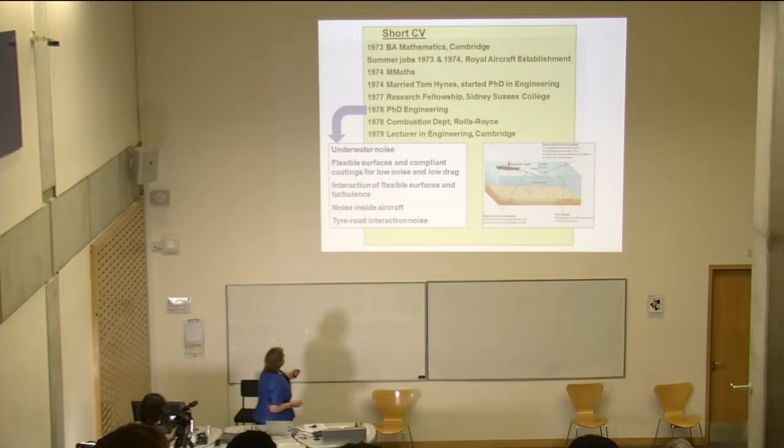So they asked if I would apply the kind of techniques I developed to jet noise to this underwater environment. That led me into the whole issue of turbulence near flexible surfaces and compliant surfaces. One of the things I worked on quite early on was putting flexible coatings over sonar systems in order to attenuate some of the noise of the turbulence.

I did some theoretical work which showed it could be beneficial. And, you know, with a ministry project like that, you never really know—they just say, oh yes, that's very interesting.

I think 15 years later, I served on a senior promotion board within what was probably by then not quite DERA yet. The person I was asked to review had taken that work and manufactured the compliant coatings, and they'd used them. So no one told me that at the time.

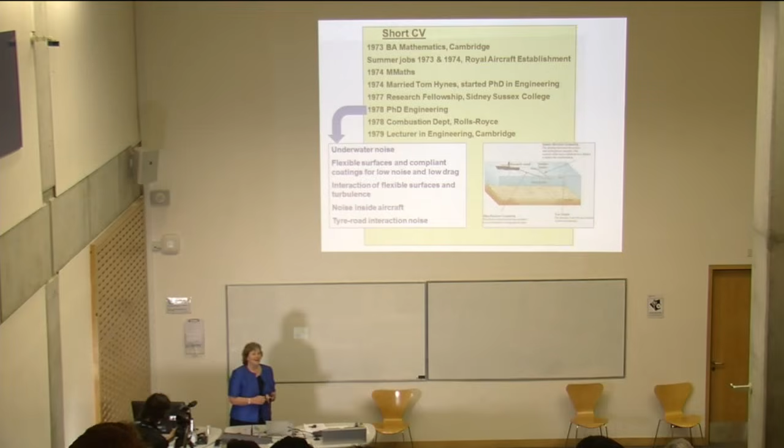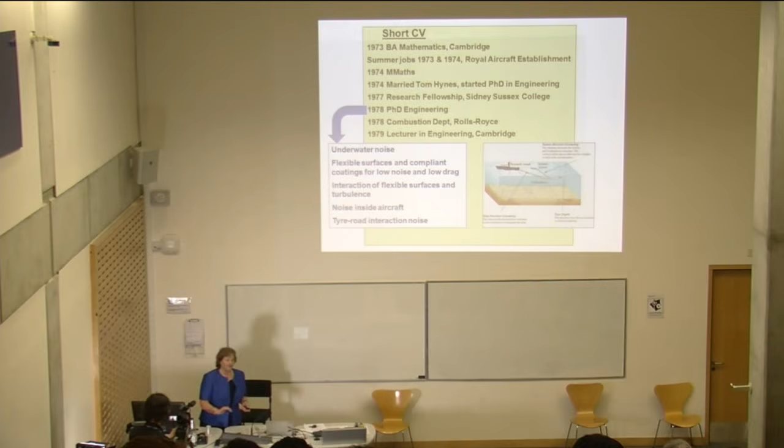But that led me into a whole load of other things relevant to water, like how can you use flexible surfaces to reduce the drag on hulls. We know dolphins have very flexible skins, and it was learning from nature the kind of compliance that could do things like attenuate the onset of turbulence, or if the flow was turbulent, reduce the drag.

So this got me into all sorts of problems in underwater acoustics, and one of them I'm shown here.

This was some work I did at the request of Schlumberger, part of the oil industry. Schlumberger help oil producers find oil-bearing rocks, and it's done by towing what they call acoustic streamers, which are long aerials, and these can be up to 2 kilometers in length behind a ship.

In this long streamer, they would be full of hydrophones listening to the noise, and then they have a source, and they listen to the reflected waves coming back from the rock. From that, you can determine the speed of sound in the rock and identify where you've got the kind of changes in structure that would mean oil would be trapped at that location.

But as they tow these hydrophones, there's a turbulent flow over them, and they're listening for these weak reflected sounds with turbulence on top. The question is, how can one attenuate that? It turned out again that you can make fancy layers of the right kind of compliant material in there to attenuate that so-called flow noise.

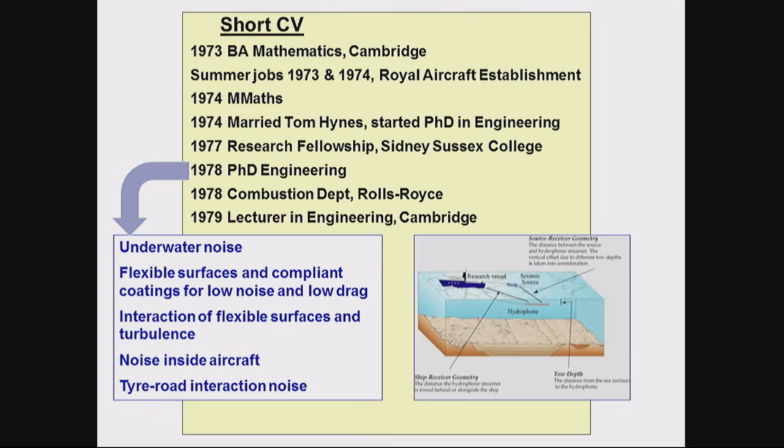One of the things Schlumberger wanted to do was go from that sort of diameter aerial, which would be filled with liquid, to much smaller diameter, so it'd be easier to deploy, with a viscoelastic interior. I developed techniques which they used to design those so-called dry streamers rather than the liquid-filled ones.

It turned out to give them quite a niche in the marketplace, and meant in the end that with those small diameters, instead of towing a single one as shown here, you can actually have ships towing about 10 or more streamers at once and getting much more information.

Up front, the lower noise is because you put sensible things on the walls that stop that transmission. So actually, it's very similar to the sonar problems - turbulence on the outside, what's the right coating and what noise would you get inside?

A particular element of the fuselage is, for structural reasons, it's got lots of ribs. So as the turbulence excites the walls, there's lots of scattering that happens on the structural reinforcements, which made that a particularly interesting project. And then led me into my next noise project, which was, well, if you can do the stringers and ribs that support the aircraft structure, you ought to be able to do the patterns, the tread blocks on a tyre.

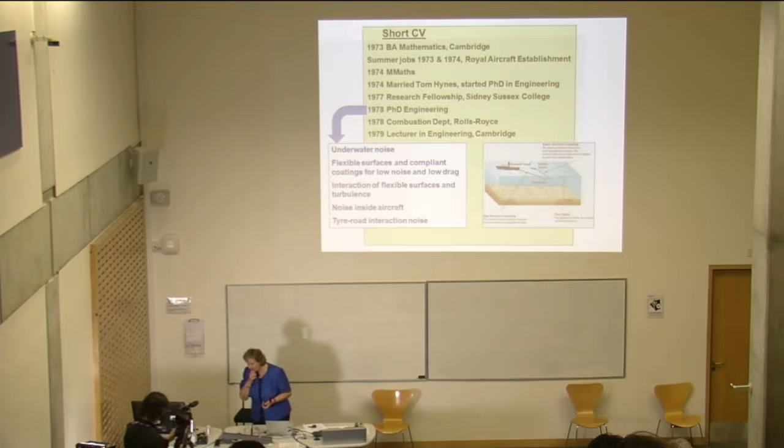Currently, the design of the tread pattern on the tyre is done by the design department. And I don't mean mechanical design - this is the aesthetics of something that looks like it's a tyre that would go fast and looks modern. So it's purely then being done on what it looked like, and so there'd be nice sweepy things.

Now they had techniques that could predict how effective different patterns were at shifting water, but they couldn't predict the noise level effectively from different patterns. So that was the question: can you help us do that? Lovely question to be asked.

And that led into a whole series of work. One of the things that's really important there is those tread blocks vibrate in a contact patch where the tyre's shaped like that and the road's underneath, and just the shape of that geometry gives a huge amplification.

It's the equivalent of having something vibrating in free space or putting it in a trumpet where you've got a horn to match the impedances. So easily one got 20 dB amplification through that horn effect. And we dealt not only with the vibration, but how one could get a more leaky horn and avoid some of that amplification.

Another area that was an important influence on my life - I'd been in Cambridge throughout. I wanted to get some industrial experience, and I went and worked in Rolls-Royce. Again, it wasn't for very long, just for 3 months.

I went and worked in the combustion department, so doing something completely different, and they gave me a job to do. I designed how one could optimize a sampling to get the most representative sample from the exhaust of a jet engine. But as I was leaving...

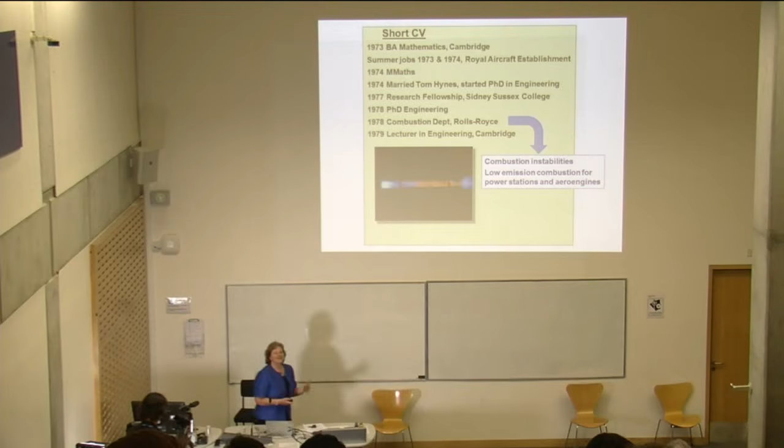And that set up a rig that became a really important part of a very flexible rig that allowed me to do lots of things around combustion. This is a picture—not a very good picture, but this is one of the geometries we looked at.

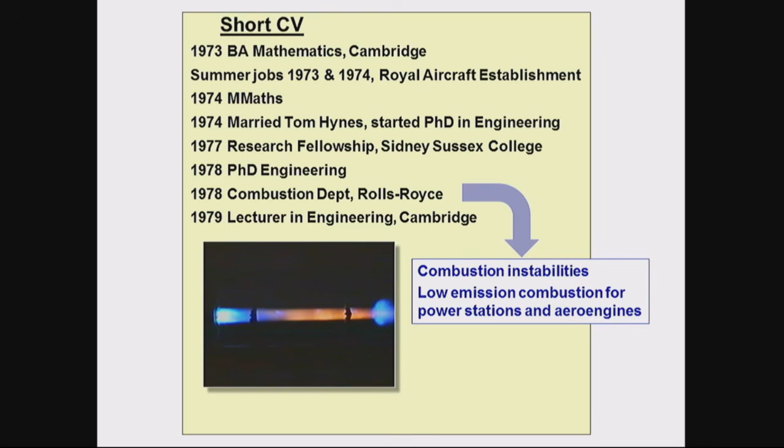What's at the heart of these instabilities is that you have combustion in a combustion chamber, which just tends to be a resonator. When you perturb the combustion, the unsteady combustion generates sound—if at home the gas boiler comes on, when it first goes on, it roars. So when combustion's really unsteady, it generates sound. But in a resonant system like this, those sound waves bounce about and get reflected from the ends, and you get flow unsteadiness coming back onto the combustion, and the combustion can respond to that. So combustion generates sound, but sound produces unsteady combustion, and you've got a feedback circuit that can go unstable.

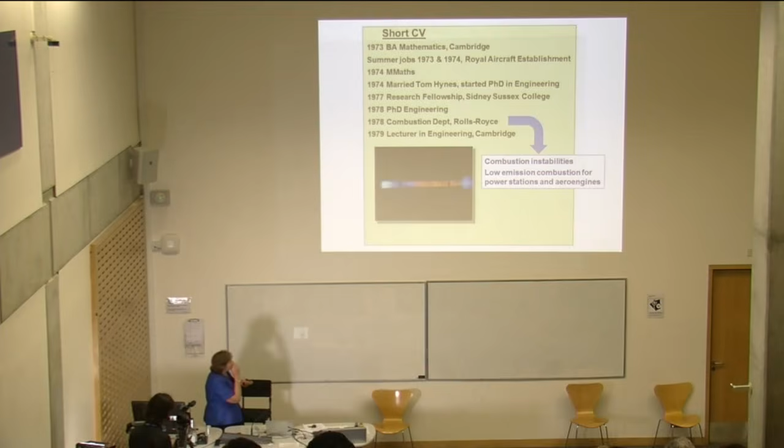That was at the heart of this instability. The first geometry I looked at was one for an afterburner on a jet engine.

So this is the main engine—the fan, compressor, combustion chambers, and turbine. If you just want thrust for a short time, for example Concorde used afterburners to take off and also to go transonic, where it needed thrust for short duration but didn't want to carry a bigger engine around all the time, you can do afterburning, which is really just squirting more fuel in and burning it in an empty duct. The idea is you've got a particular mass flow; if you reduce the density by heating, you increase the velocity, but thrust depends on velocity squared times density, and that increases, so you get more thrust.

Now these can go unstable for just the reason I've been describing. The flame is burning in the wake of a body—a bluff body, or a body that has a big wake behind it. The fuel gets squirted in upstream, and the flame burns down there. Small unsteadiness causes unsteady combustion, waves come back, they reflect, and that perturbation in velocity past this flame holder actually perturbs the flames—you can see the wrinkles traveling down the flame.

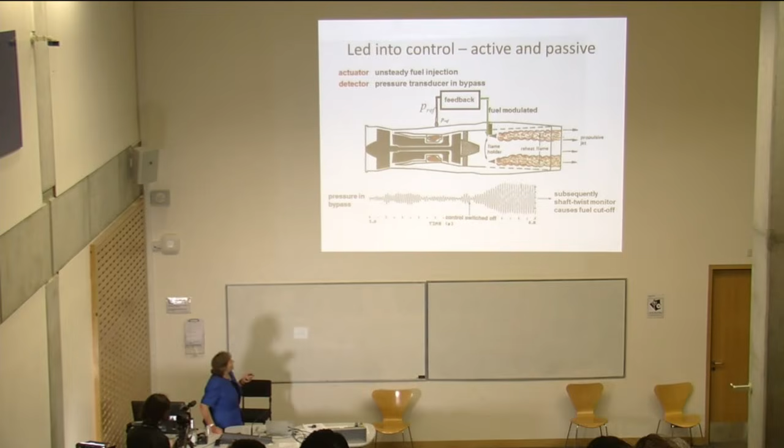I did modeling about what was going on. But one of the fun things was, could we actually control it? Anti-sound was a big thing around then, so the idea was: we know what's causing it—supposing we put the fuel in unsteadily but with just the right phase, so it would burn unsteadily but out of phase with the flow perturbations causing the unsteady combustion. By adding some additional fuel, could we stabilize the system? To work out the phase, one had to measure the pressure, have some sensible feedback, and something to modulate the fuel.

So we did work in the lab on our system, which was really a model of one of these flames, and it worked fine in the lab. Now, usually the lab scale was like that, but that was about a third of a megawatt. Normally you'd go up through TRL levels trying increasingly complex systems, and Rolls-Royce said, nah, we may as well go straight to the engine.

The lab results look good. We're going to do it on the engine next. So this is their experiment.

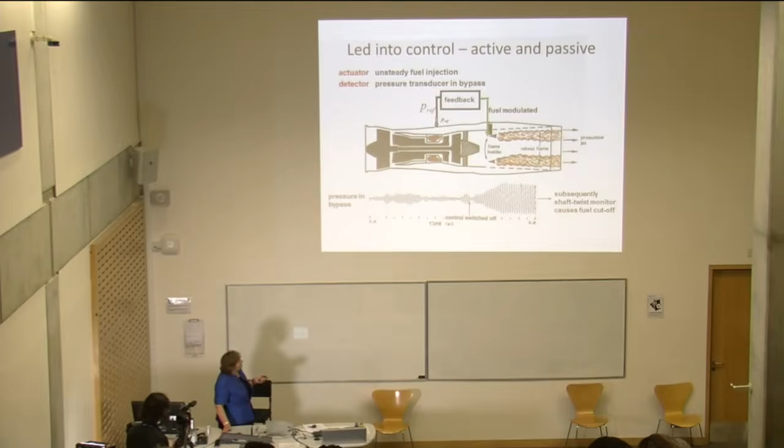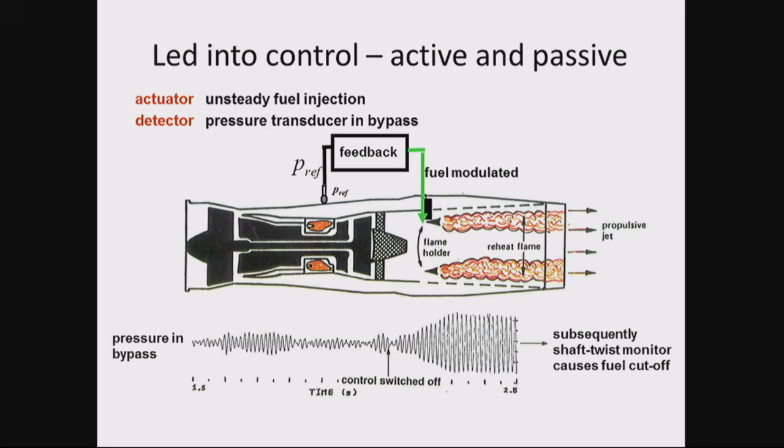Here is, with control on, very little pressure oscillations. Then they switched the controller off, and the pressure oscillations really grew rapidly. And then they had a monitor on this shaft, and when the shaft got too distressed because of the twisting going on, it cut the fuel out, and eventually that cut out there. So that was a really nice application that went right from lab to an engine.

The only downside is once you understand a system well enough to design a controller like that for it, you actually know much easier ways of getting rid of the oscillation. We could control it with passive systems that just increase the acoustic damping. And that's more what has happened in practice.

But research carried on the active control, and one of the things that really wanted to do, of course, if you operate an engine, you go through lots of different operating conditions. So you really need a controller that can learn online what it needs to do in an adaptive system.

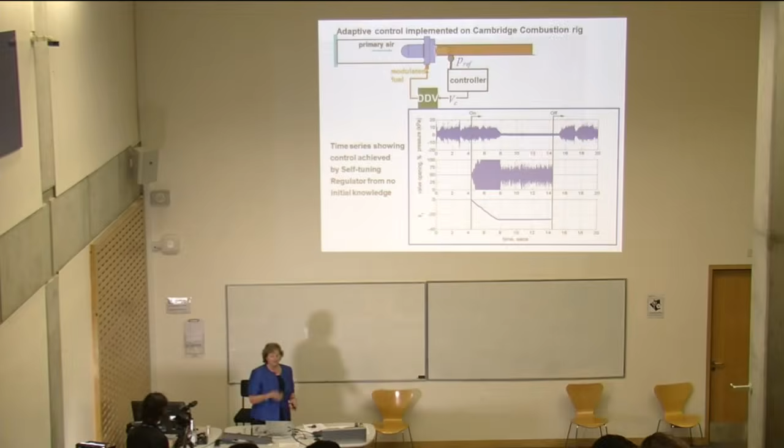I worked on adaptive controllers with a colleague at MIT, where you put some structure into the feedback control, which was based on an understanding of the kind of response that you got from the combustion system, but not any details about frequencies or numbers, but just some very simple assumptions about the response, that it didn't respond at very high frequencies, for example, things like that. And then online, the feedback system learns what parameters are needed in the controller.

This is an example on the rig. These are the pressure oscillations. And then the controller switched on with all its parameters set to 0, so it doesn't put any fuel in initially. And then it starts to put some more small amounts of fuel in, valve openings, the unsteady fuel going in, learns online what the parameters in the controller need to be. There were a lot of them, I've just shown one here. And then it finds a converged solution, brings things under control, and the pressure comes right down, with the valve working less hard, and then when we switched off the controller, the sound grew.

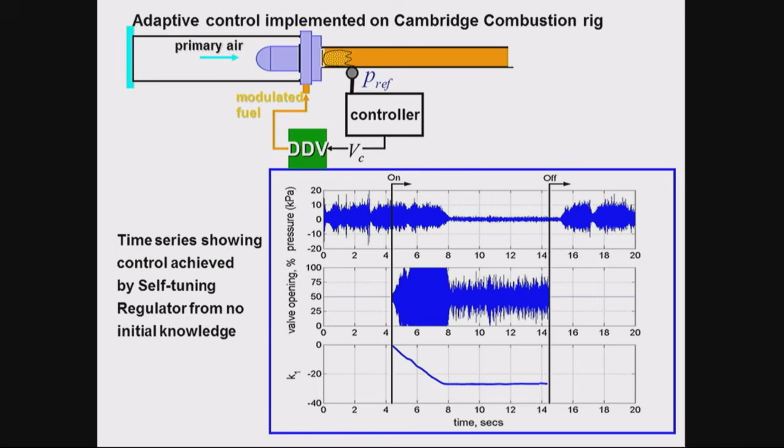So that sort of took me from knowing about acoustics to learning about, well, through linear systems, which is just what acoustics is, getting into control, getting into robust control, model-based control, and adaptive control.

The combustion activities at Cambridge were really growing, so I was looking at a range of things, and Rolls-Royce, who'd always been funding turbo machinery work there, wanted to grow our partnership to include not just turbo machinery, but also combustion and acoustics, and we set up something called the University Gas Turbine Partnership, which I then ran.

Aviation's always been important. It's been a hobby as well as part of my career, and here's me in a sort of 1980s hairstyle flying. I had a share of an aircraft and going out for the day, because Cambridge is far from the coast or mountains, so the aircraft is a good way of going out.

I became a reader in '86, professor in '94, and something that made a big change was a sabbatical at MIT around about the millennium. I became a fellow of the Royal Academy of Engineering in '97 and vice president not very long afterwards. I think they were really keen to have a woman vice president who didn't have many duties associated with it.

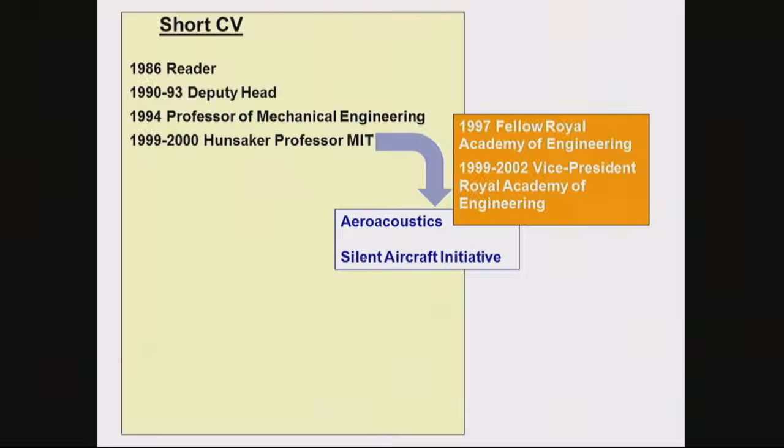At MIT, we'd have these bag lunches where we'd talk about, I was visiting the aero department, what would really make a difference to aerospace. And aerospace is really constrained by the fact that airports at locations where people want to fly from are operating at full capacity. No one wants an extra runway or an extra airport anywhere near where they live.

We thought just making an aircraft a bit quieter wouldn't be enough, but supposing we could come up with a silent aircraft. And then we'd start to talk, well, what would it look like? What would it have to do? And so we'd been talking about this. It was sort of for fun, but we thought it was a really important area to look at.

So I began to get interested in applying my acoustics knowledge to aircraft noise again, rather than instability and underwater. So that led to the Silent Aircraft Initiative.

I've got a few slides now on that work.

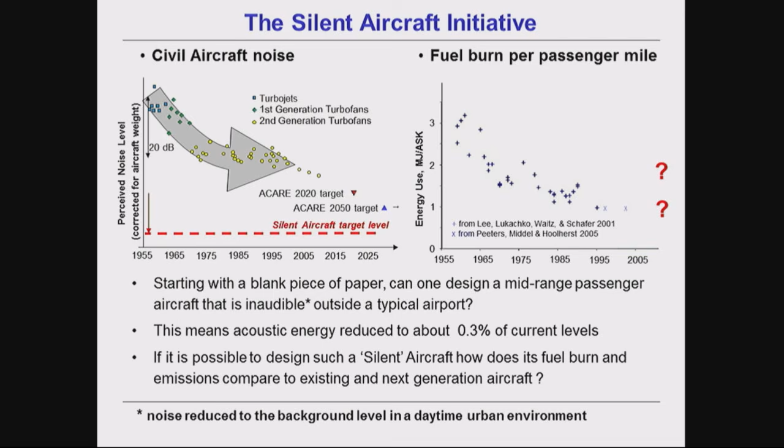So if we didn't make any preconceptions about what the aircraft should look like, could one design a mid-range passenger aircraft that would reach that noise level outside the airport perimeter? And if we could, what would be its fuel burn?

Now, we got money from an initiative called the Cambridge-MIT Institute, CMI. Extraordinary, really, to get money to do that sort of thing. It's not something many funding agencies would fund, but we were very pleased. In total we had about 40 researchers from Cambridge and MIT working on it.

But you can't just have academics, students and postdocs designing an aircraft—industry involvement was absolutely crucial. We had something like 25 industrial partners, but the main ones were Boeing, who made some of their design codes for blended wing bodies available, and Rolls-Royce, who let us use their engine design codes. Some of our parameters went outside their range, so we developed the codes further and also did experiments to test as we went beyond.

We brought in a local aerospace company, Marshalls. We had advice from NASA. The regulators, NATS and CAA, were partners, and we had a number of airline and airport operators involved. Hacan were fun—they're the Heathrow active campaign against noise, and they liked what we were doing. We also had equipment manufacturers, and Cranfield University did a small-scale alternative study using some of the same codes we were developing.

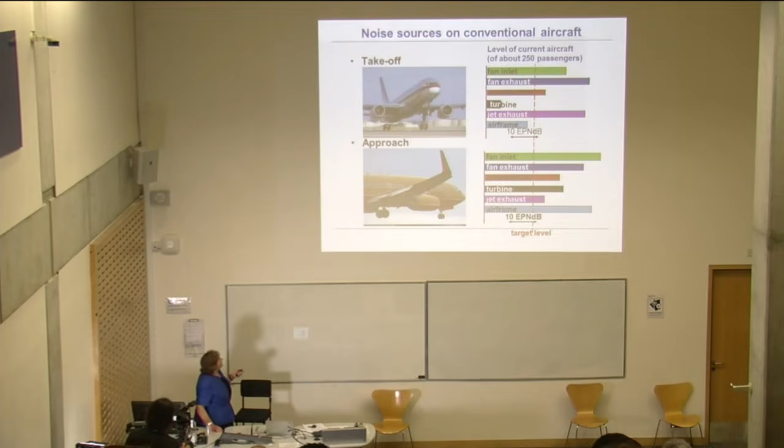From the fans, the big fans at the front. The fan inlet noise is attenuated by having acoustic liners, sound-absorbent material around the intake ducts. But you also get the noise of the fan propagating backwards out through the bypass ducts, and that's pretty much the dominant noise source.

And as I was saying earlier, almost equally balanced with the noise from the turbulence in the jet.

On landing, the airframe makes almost as much noise as the engine, and the airframe noise comes from the undercarriage. It comes from the flaps, which are lowered to increase the drag, and from the slats, which are lowered to give high lift. Not much jet noise then, but the fan is operating off design, and you get a large amount of forward propagating fan noise.

Our target level is this dashed line here, so we had to address all those noise sources.

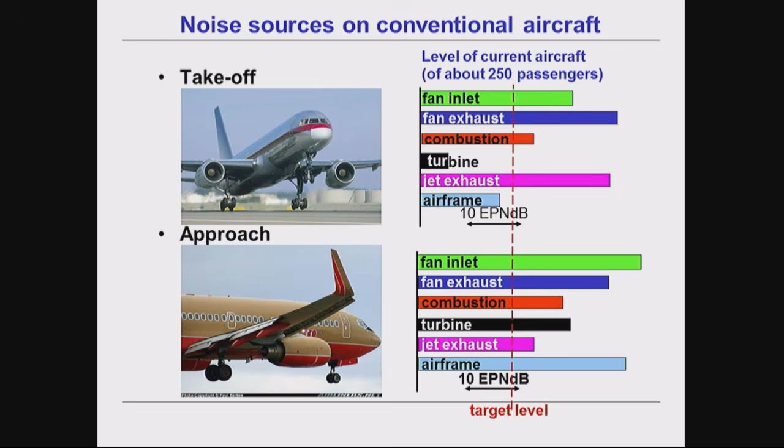This is the design that we came up with, and I won't have time to go through all the details. It's what's known as a blended wing body, which means you get lift on the center body where the passengers sit, as well as on the wings.

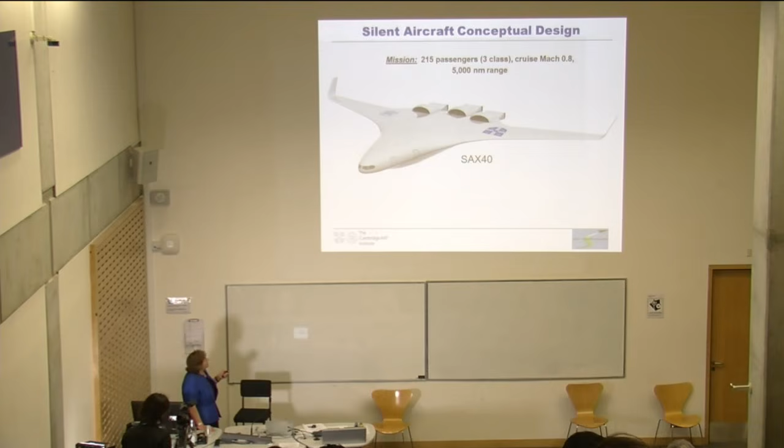We came up with a design with 3 engines, and they are embedded in the airframe, and each engine has something that's like a conventional engine with a fan, compressor, turbine. But that turbine drives not just its own fan, but 2 auxiliary fans.

And this way we get lots of slow-moving air from one single core. And that's what is in one of these compartments here. So in total, we've got 3 of those and 9 fans in all. In this way, we're able to get that high bypass ratio by having lots of air moving slowly.

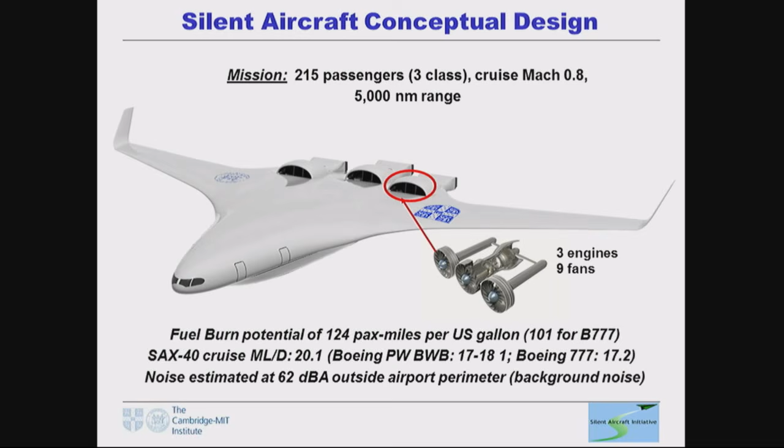But because the fans sit side by side and each of them hasn't got a particularly high diameter, we're able to embed them in the airframe in a way that doesn't increase the drag very much.

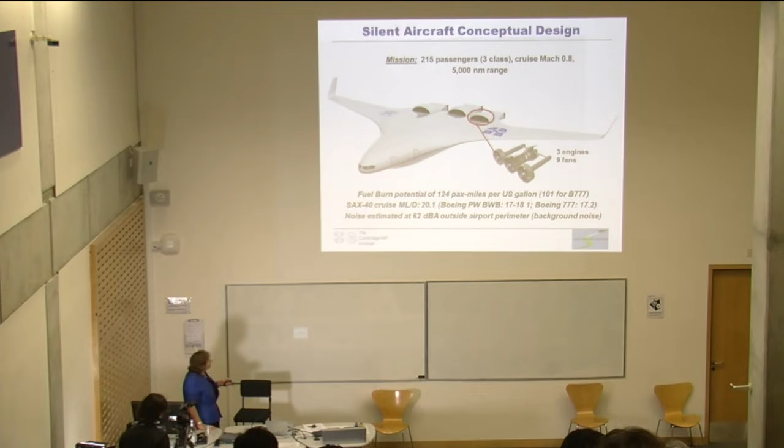We estimated the fuel burn to be about 25% better than current aircraft, and also that we would meet our noise target.

These are some 4 directional views, and from on top and the side it looks, well, that direction looks quite elegant. Side on it looks really ugly. And it's been described as looking like a pregnant cow from this direction.

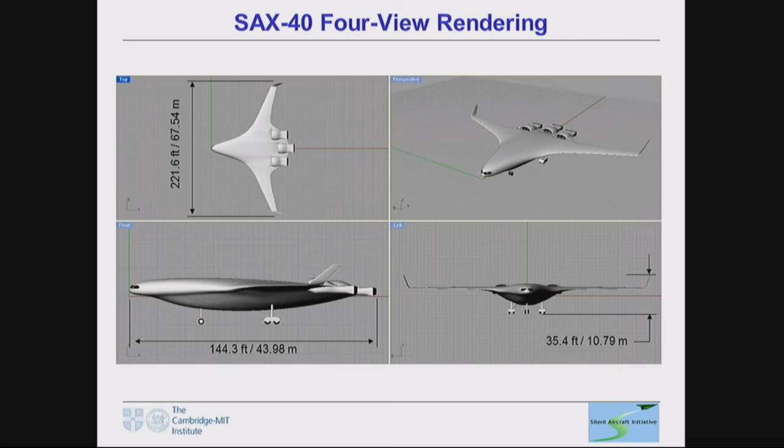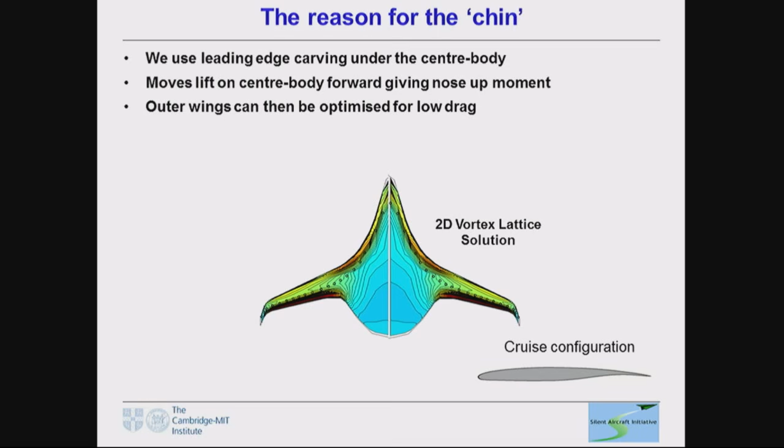Now, Boeing have a blended wing body design, but the design they had at that time got that nose-up moment by having some downward force here towards the back of the center body. Now, if you're designing an aircraft, you don't want to have a downward force. Okay, it gives you the right moment to bring the nose up, but that downward force really is destroying lift, which is the ultimate aim.

But that carving that we had, it produces an upward force near the nose. And so you get that upward moment by having the aerodynamic shape giving some upward force near the nose rather than downward force at the back.

Now, we were using fairly quick, simple methods to predict the aerodynamics. And through that, we were able to do lots and lots of cases and lots of optimization. And once you get the center body giving this pitch up moment, then you can really optimize the outer wings.

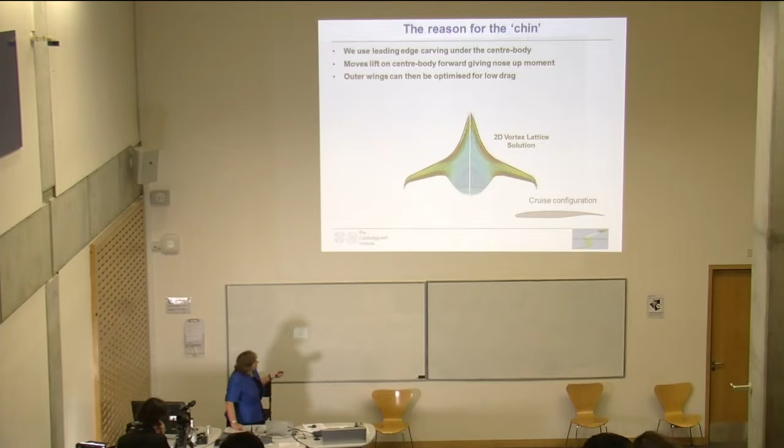And in doing that outer wing optimization, it was possible, we came up with shapes that look very much like the shapes of modern aircraft. They weren't compromised in the way other blended wing bodies are.

And the lift distribution on the outer wing was an elliptical lift distribution. I know there are a few people in aerodynamics in the room, so this is the holy grail for aerodynamics. It's the best kind of lift distribution you can have to maximize lift to drag.

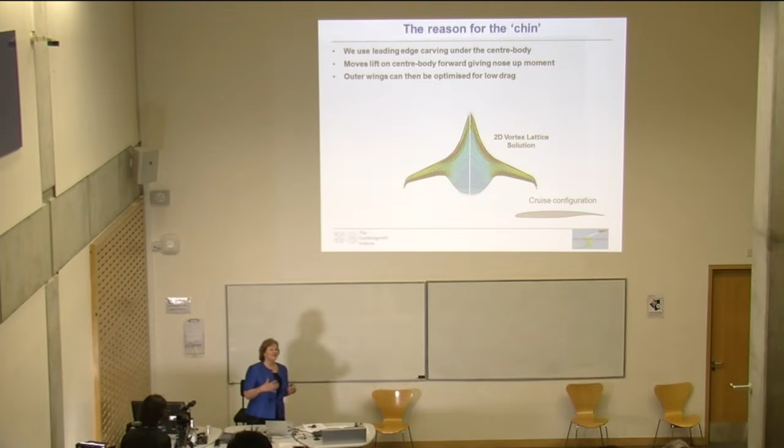Now, as I said, we were using fairly simple approximate methods to do this, and it has to be said that Boeing, who had already got their own blended wing body design and had been flying a scaled model of it, didn't believe the figures we were getting for lift to drag on this because it was so much better than their blended wing body.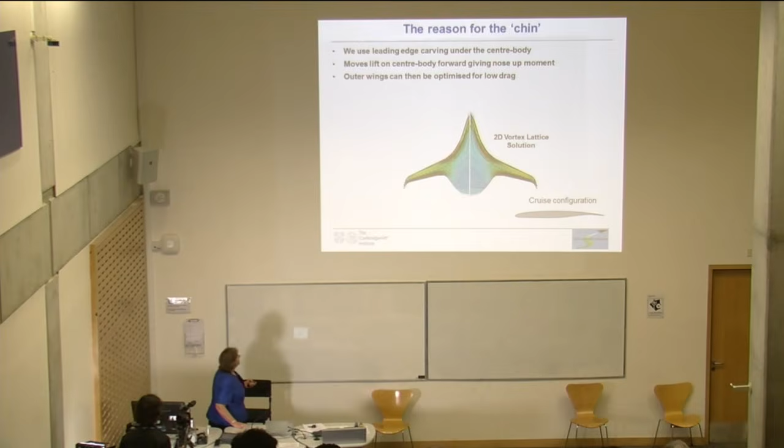So they said, could we take your geometry? We let them take the CAD files, and they ran it on their own in-house CFD.

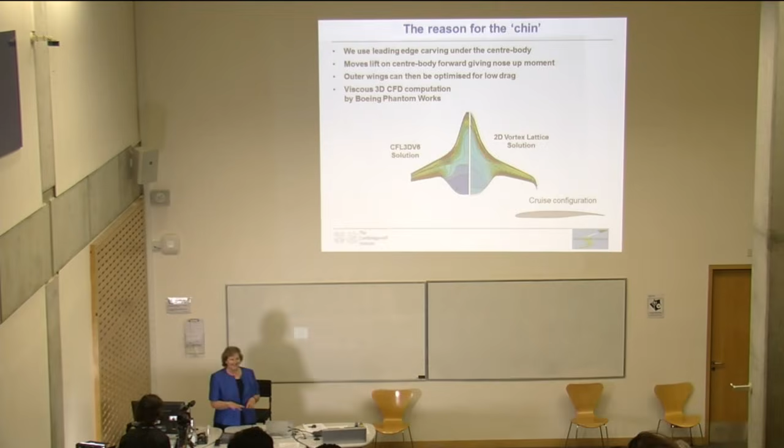It's rumored the lights dipped over Seattle as they crunched away at this for several months. And they came up with their solution, which actually confirmed the lift properties that we were predicting.

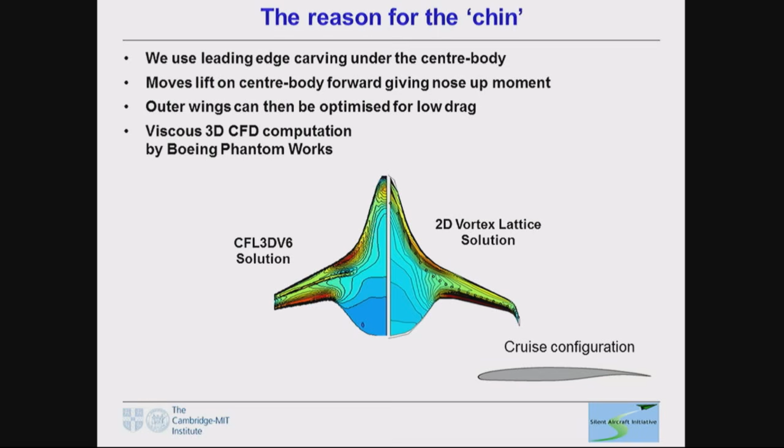And since then, Boeing has got NASA to go on and develop more on this geometry for them.

So the things that lead to low noise: with those 3 fans in each engine, 9 fans in all, we're able to get a high bypass ratio, which reduces the jet noise. The jets are so low speed, they wouldn't give good efficiency in cruise, so we've actually got nozzles that would close, so that in cruise you can close the nozzles down and get a high-speed jet, but have a low-speed jet near the ground.

The airframe is an important element to reducing noise because the fans here will produce noise, but it's prevented from reaching the ground because the engines are mounted on top of the airframe. And also there's sound-absorbent material fore and aft of the engines.

So this little movie, which is from models in a water tank, just illustrates some of the shielding effects. A conventional aircraft has the engines underneath, so there is interaction with the aircraft.

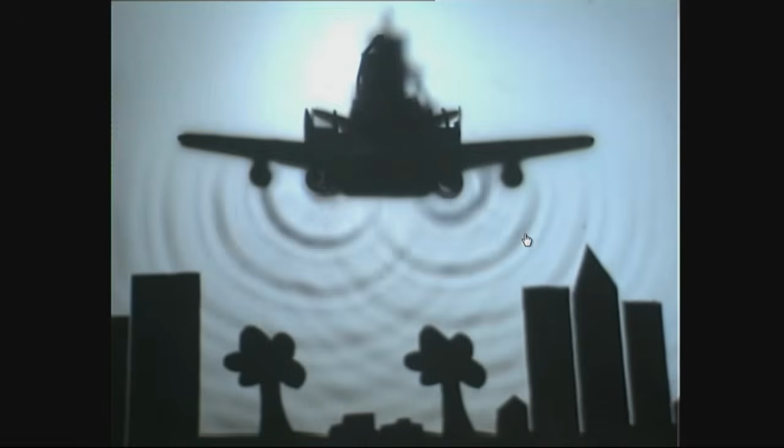Such interaction there is with the aircraft tends to reflect the sound downwards.

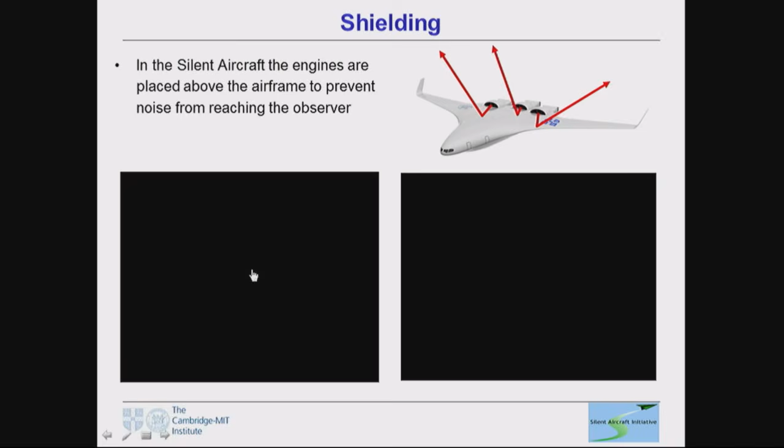Whereas if you put the engines on top, I think you can imagine how it goes, that the sound goes up. I don't know why it's misbehaving, just try once more. No, it's not going to do it. No. The engine's on top, the sound goes up.

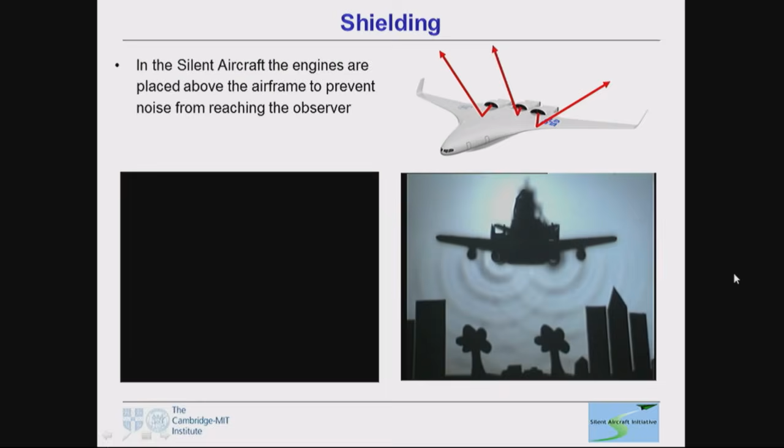I've got some sound files, which I hope will work, and these are our predictions of the noise. When the engine team first started to design the engines for this, using Rolls-Royce's codes, they said, well, I want to see that you can design a normal engine. So they were given a task which was equivalent to one of the engines that Rolls-Royce had in planning at that stage. So the team designed it, and it was a blind study, but it turned out to look very similar to the Rolls-Royce design.

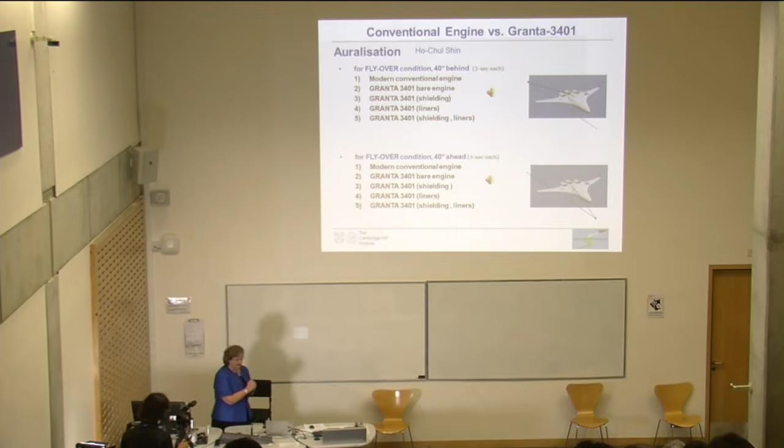And what you'll hear is, first of all, the noise from that so-called conventional design. Then they did various things to minimize the noise from the turbo machinery as much as possible, so you'll hear the noise from that. This first case is the noise behind the aircraft and at 40 degrees down from the horizontal. So the effective shielding is negligible there because there's no blocking surface. But the rearward duct passages are lined with sound-absorbent material, so next you hear the effect of the liners, and then you'll hear shielding plus liners.

Conventional. So this is design reduction, no effective shielding, and then the liners, which you can just hear.

So that was behind, and now this is the engine noise down and in front, where now shielding will have an effect.

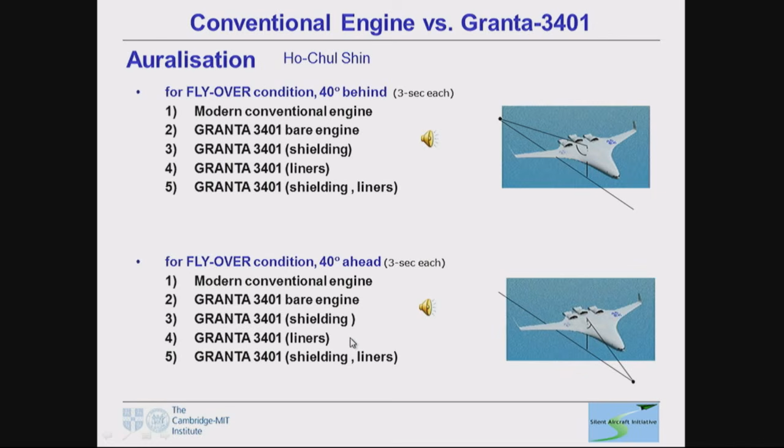Conventional. Bare engine. Shielding. Liners. And shielding plus liners.

So really big attenuations from the shielding and from the liners. And we gave ourselves longer ducts than you would have in current designs, but that's possible because of the shape of our geometry.

Moving on with the technologies for low noise. The airframe design with that high lift to drag ratio actually has a lower stall speed, so we would propose to bring this aircraft in a bit slower than normal, and many of the airframe noise sources scale on velocity to the 6th power. So coming in slower, just a bit slower, still within the standard pattern of traffic around an airport, but slower than a normal aircraft of this size would be.

I'm not sure if I said, it's supposed to take 215 passengers.

Operations are therefore important. At takeoff and climb, we would optimize the thrust for minimum noise on the ground, and use a slightly slower, slightly steeper approach.

And there's a double benefit from coming in slightly slower. You can land further down the runway and still stop with all the required safety features. And actually, some airports are already doing that. Frankfurt does it, has a displaced threshold for aircraft that are smaller or lighter. So it's not particularly new.

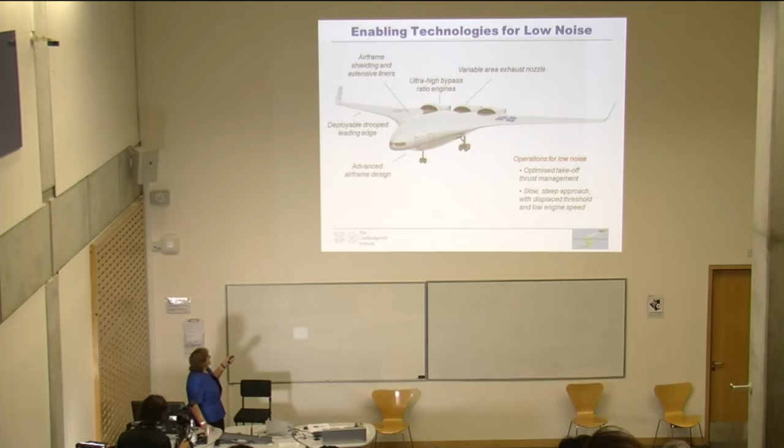Slats are noisy, and we could get the additional lift that we needed with just a continuous drooped leading edge. This is something that's used already on the A380.

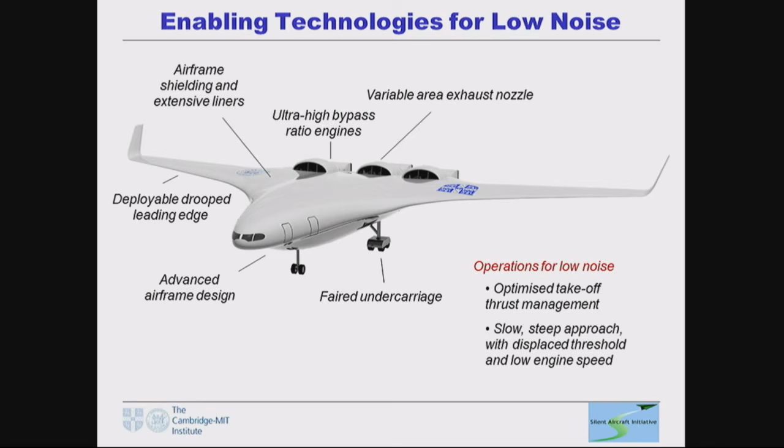The undercarriage, we designed fairings for to reduce the noise. This is showing some of the airframe noise sources, the engines, but also the undercarriage. I've got a few slides on undercarriage noise, which I don't think I'll have time to do, but this just illustrates the kind of things we were doing. Each of these noise sources would have a couple of PhD students and a postdoc working on it.

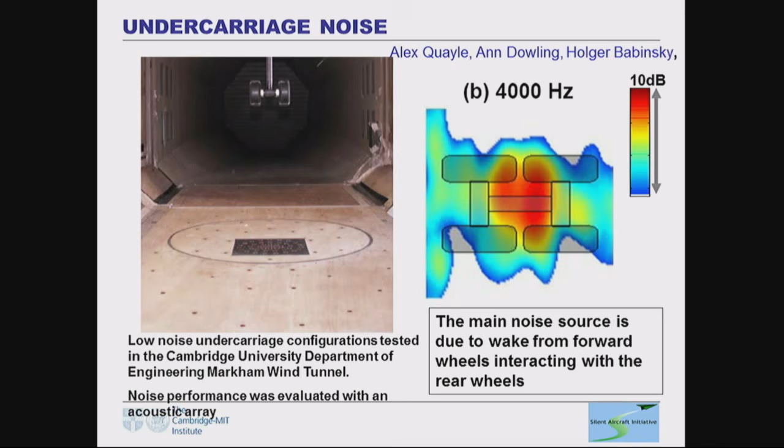We were making noise measurements with a phased array of 96 microphones, pinpointing where the sources of noise are. The real source of noise is the wake of an upstream pair of wheels impinging on the downstream wheel. So we did things to reduce that, like really controlling the separation points upstream and staggering the wheels a bit so the impingement points were not at the edges of the downstream wheel. That's really the main message.

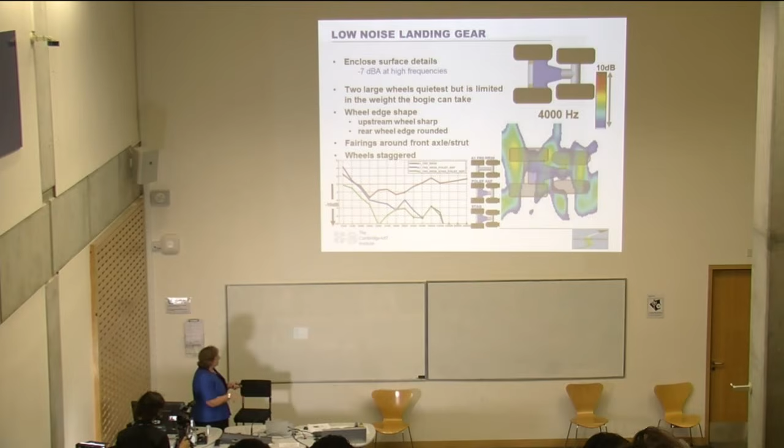I'm going to skip this, but that gave about 7 dB reduction. This is just the intensity plots with those changes on, and some fairings on the wheel struts holding the wheel. I haven't got time to go through the details, but each element of this modeling did have wind tunnel or more detailed models behind them.

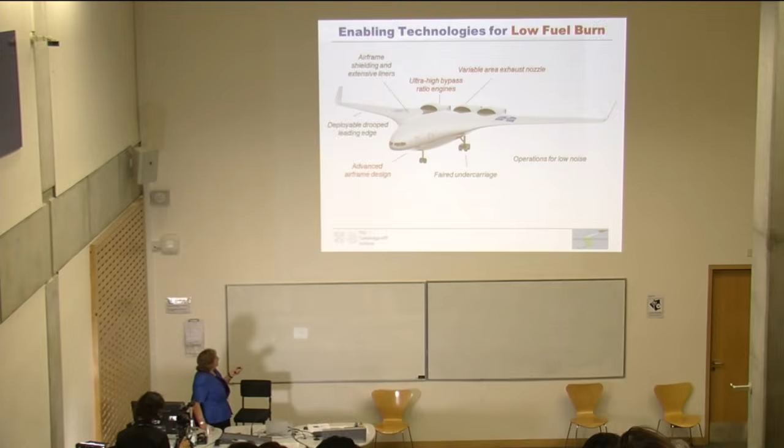This was also good for low fuel burn. The high bypass ratio engines are good for low fuel burn. The variable area nozzle meant we could, even within cruise, continue to operate at peak efficiency even as the weight of the aircraft changed, whereas a normal aircraft has a fixed nozzle and can't operate at peak efficiency all the time. The low drag airframe also helped reduce fuel burn.

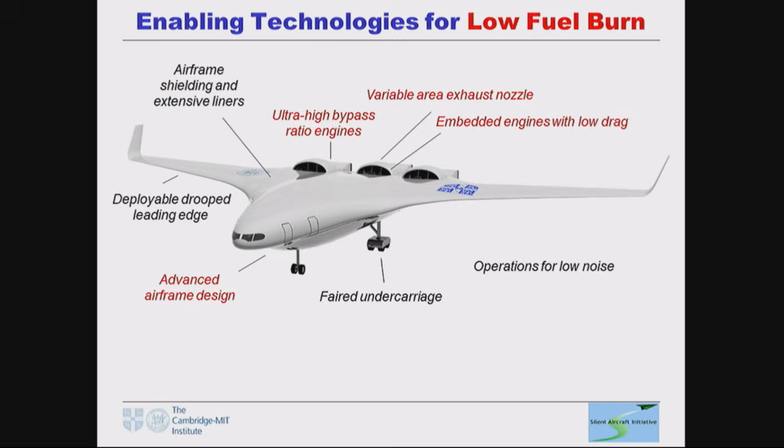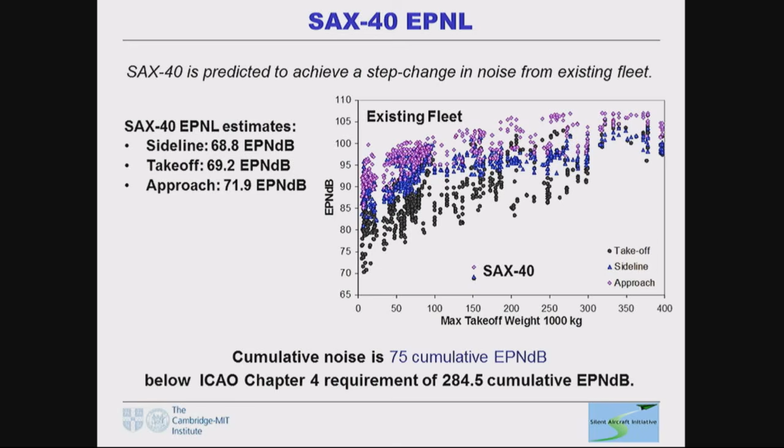By embedding the engines like this, we were able to reduce the drag. This is just showing the noise level of this aircraft at takeoff, sideline, and approach compared to the noise of the existing fleet, and it's some 25 dB quieter at each condition. The cumulative EPNdB is adding up the reductions from the 3 conditions. So we met the noise target.

It wasn't a single technology that was the answer, but really the way in which they were integrated into an aircraft and operated differently.

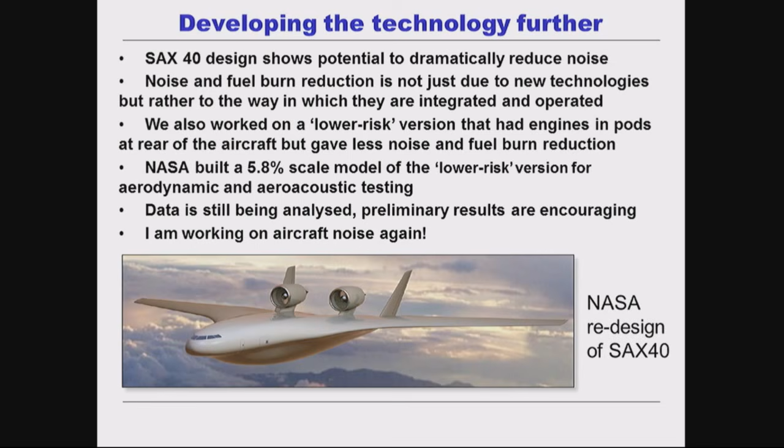We also worked on something we called a low-risk version. The highest risk really was embedding the engines in the airframe, since they have a distorted flow going onto them. We also worked on the low-risk version, which had podded engines.

NASA picked up on that one, and they've built a scale model and have now done some aerodynamic testing, because one of the real bits that's hard to model is what the low-speed, high-incidence aerodynamics is like. So they've been doing wind tunnel tests on that, and they've also done aeroacoustic tests on the wind tunnel model. They're still analysing the data, but it's looking very encouraging.

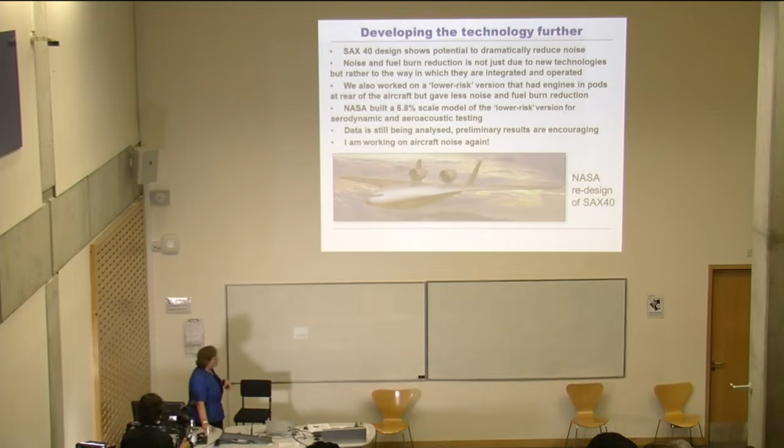For me, this was getting me back into aircraft noise again, because it showed that some of the fundamental noise sources, jet noise in particular, needed better models. This needed to be reduced even for current aircraft, and that got me back into thinking again about aircraft noise.

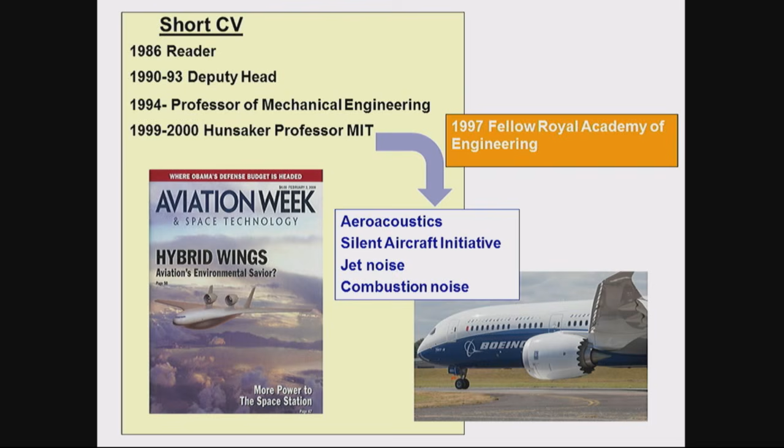I'm working on various noise sources now, in particular explaining why these edges at the back of aircraft, which are currently developed quite empirically, are good to reduce noise. It's all to do with them generating streamwise vorticity, which alters the mixing. We now have models that can explain in which ways these alter the mixing and the noise sources.

Alongside my main academic career, I've always been involved in a number of policy or governance of science roles. So I've been on various committees like EPSRC Council.

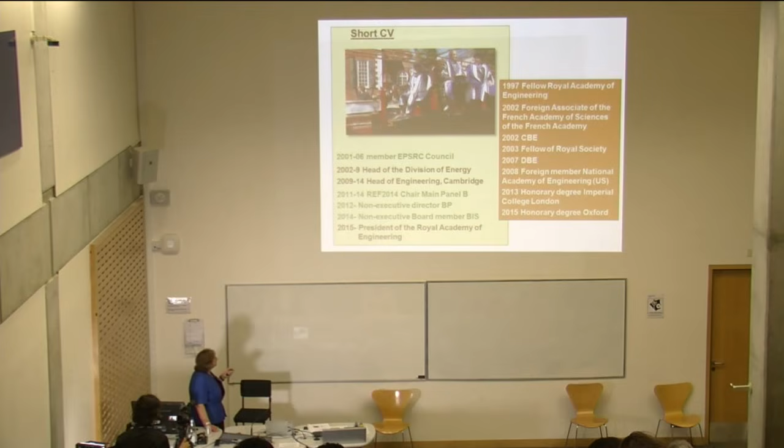Following on from that, I became head of our energy division, and then subsequently head of the engineering department in Cambridge, and other external things I've done recently, for example, chair of main panel B.

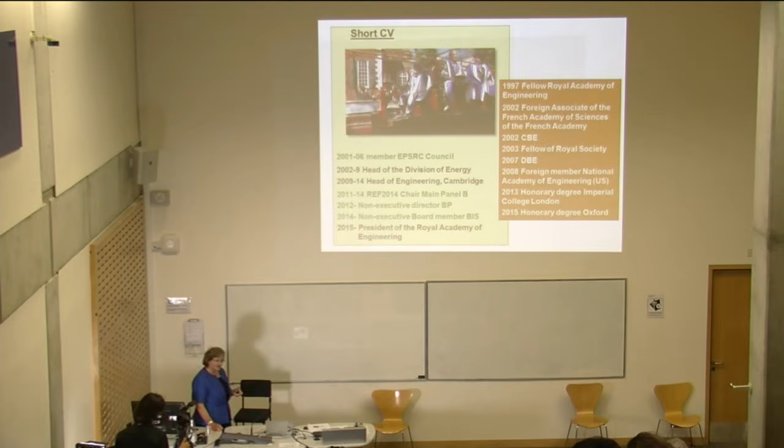I'm currently a non-exec at BP, and also our government departments have non-execs - not proper directors, because after all the ministers are in charge and have been voted to be in charge, but external people who give advice. I'm on the board of the Department of Business Innovation and Skills, which is where research gets funded. Obviously business gets supported, but research gets funded in universities.

I was really pleased to get an honorary degree from Imperial College, and here's a picture of me on your fire engine a couple of years ago.

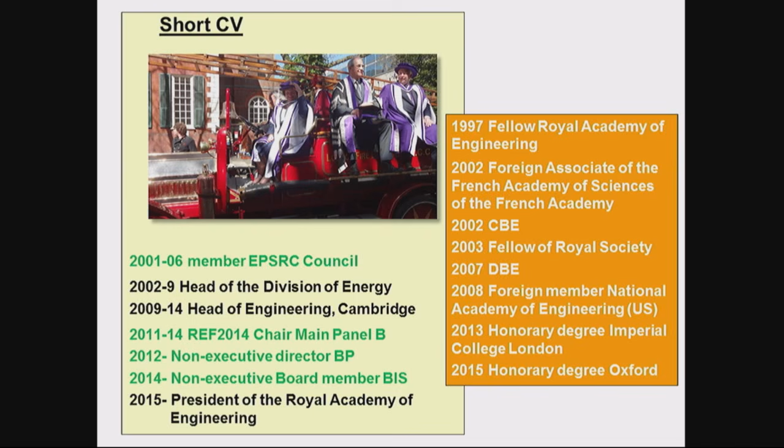And then last year, as you heard, I became president of the Royal Academy of Engineering, and that's been the quick canter through that I planned to give. I think that was my last slide. So thank you very much.

I think the prolonged applause says it all, really. I'm awfully sorry about the fire engine, by the way. Oh, it's great fun. I got to ring the bell. OK, fine, as long as you got to ring the bell.

We do some dreadful things to people we give honorary degrees to, don't we? So I feel embarrassed now. James said at the beginning you were a role model, and your lecture has been fantastic, and your career has been amazing, and you are the most amazing role model. This is where we celebrate our women in STEM, and it's hard to think of somebody who could help us celebrate it better than you have today.

But let me ask you a question. In the 1970s, I also remember the 1970s, there were very few women in engineering. Was it ever an issue for you that you must have been a bit alone? There can't have been many other women around in engineering at that time. Did it ever feel like it mattered? In maths, there were more. There were other women. I remember tea breaks and things, there were other women around, so it didn't really feel odd, actually.